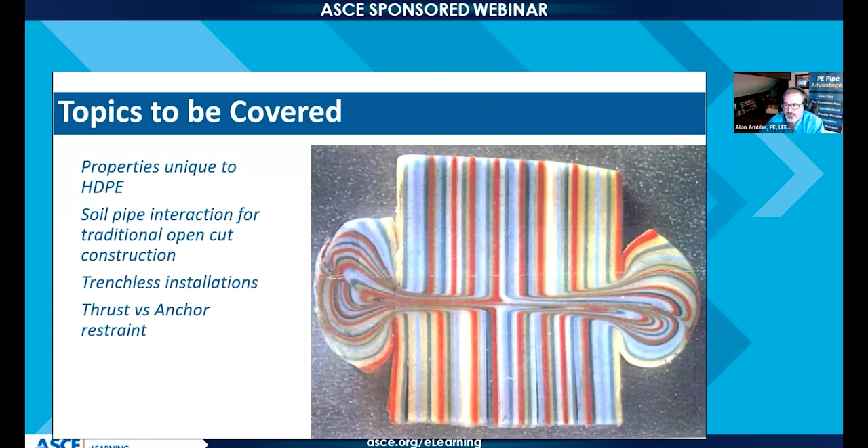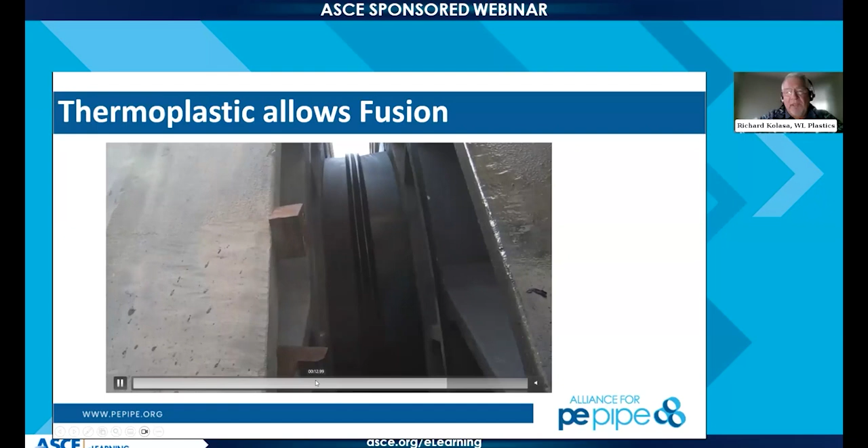So here, Richard, thermoplastic allows fusion. Go ahead and tell us what we're looking at here. Yeah, thank you very much, Alan. It is important to understand these unique properties of polyethylene. This fusion process makes our connections, we'll say, not really joints because it's not really a joint, it makes it monolithic. As you saw in that previous slide, that's the fusion joint coming together in a molten state. So you get very good bonding between those two surfaces, not only mechanically, but physically and chemically.

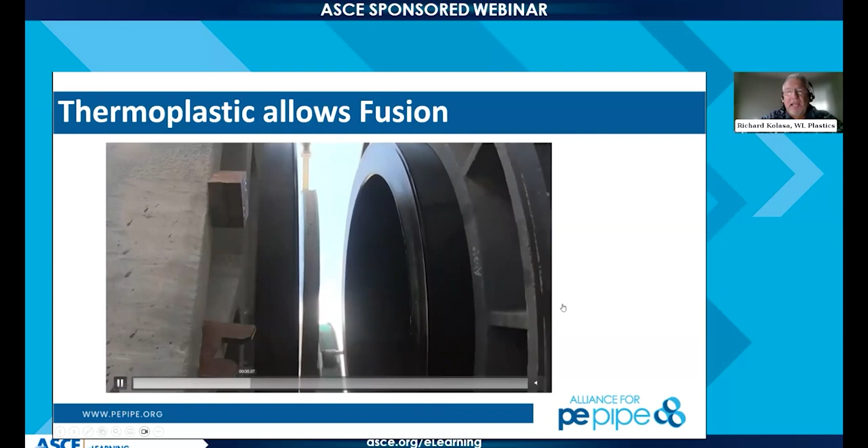So it's kind of misunderstood. They say, well, that beautiful smooth surface is really nice to see. You don't want to see a concave surface in there when you're fusing, because that means you had pressure in that molten surface area and you've pushed that molten material away from the fusible area. So that's a really good example and picture of how that fusion takes place.

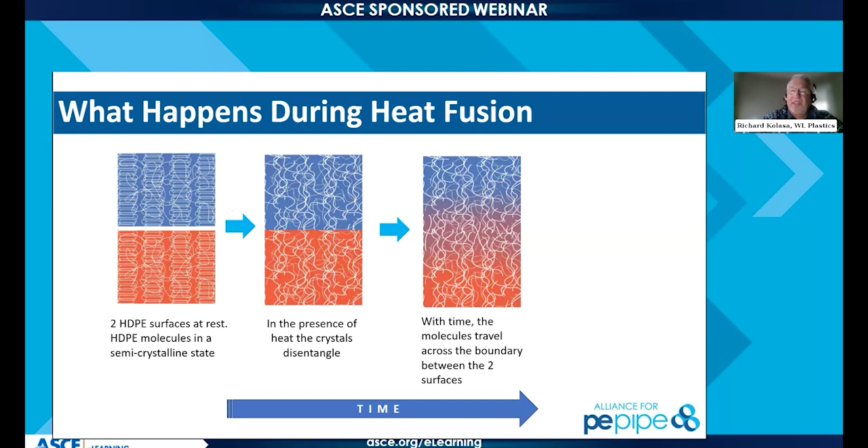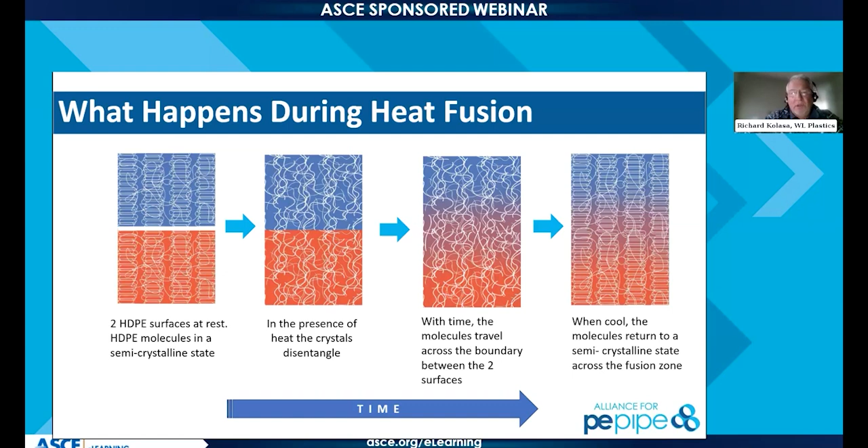And those little strands between those little round circles are describing that area, and those crystalline, straight line areas in this first area, and amorphous regions are the areas between those crystalline areas, which is about 70 to 80% crystalline structure, will affect tensile strength, stiffness, chemical resistance, and permeability. And those are the key aspects of what your piping lines will actually do, and how that piping line will perform.

So, Richard, this is a heavily engineered, from a chemical engineering standpoint, product. Is that correct? Yeah, that's correct. I mean, you can think of plastics, anything from a low molecular weight plastic such as candle wax, all the way up to our high density polyethylene pipe, which is very, very engineered. And it takes a lot of catalyst, a lot of reaction technology to put these polymers together to make sure that those crystalline areas are all uniform in size, so then you minimize the amorphous spaces between them. But then we also have technology to add comonomer into those amorphous areas to actually increase the amount of entanglement that we have between those molecules to give better strength, stiffness, and toughness.

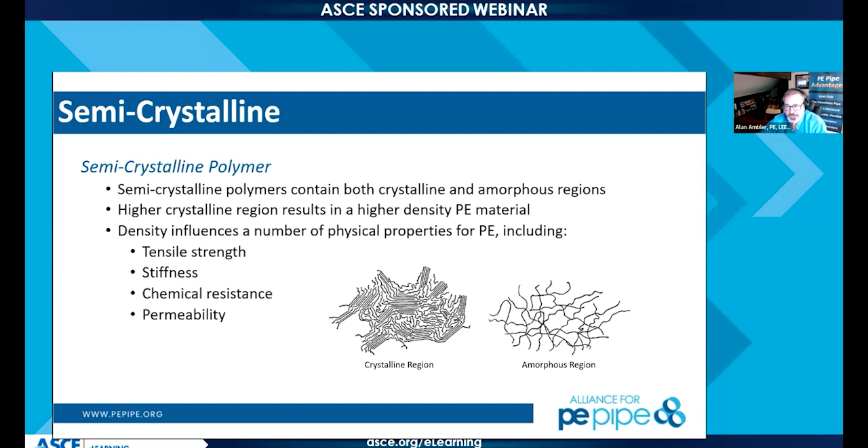So you can certainly introduce this concept of viscoelastic behavior to us, Richard, and we're going to permeate the remainder of the presentation with this term in particular. It can be somewhat difficult to grasp, but tell us about it, Rich. Yeah, and you're not wrong about that.

Viscoelastic behavior is behavior, especially on the yield point of the polymer. So before you have permanent deformation or breaking of those polymer chains, you can have this creep or deformation effect underneath that yield point, where if load is applied or stress is applied, you can have strain deformation in this product that needs to be understood.

And if you're underneath that yield point, then you need to really understand that you're rearranging the polymer a little bit, but it's just like taking a spring and stretching it out. You kind of change the appearance of that spring because you're opening up that gap or that amorphous area.

But then when you release that stress, then you'll have relaxation. So then you'll have a behavior that it will actually come back to its original state. Now, we've had lots of discussion about how much does it do it, how little does it do it.

A lot of the testing that we've done with this unique property of high density with stress relaxation, if it is under very little stress, let's say 10 to 30%, because you think about a horizontally directional drilled pipe or a bursting pipe where you have tensile stress being applied to these pipes, then we want to make sure that that pipe relaxes and recovers to make sure it establishes its performance for pressure rating or even a gravity fed situation where you don't want it to deform under soil loadings either.

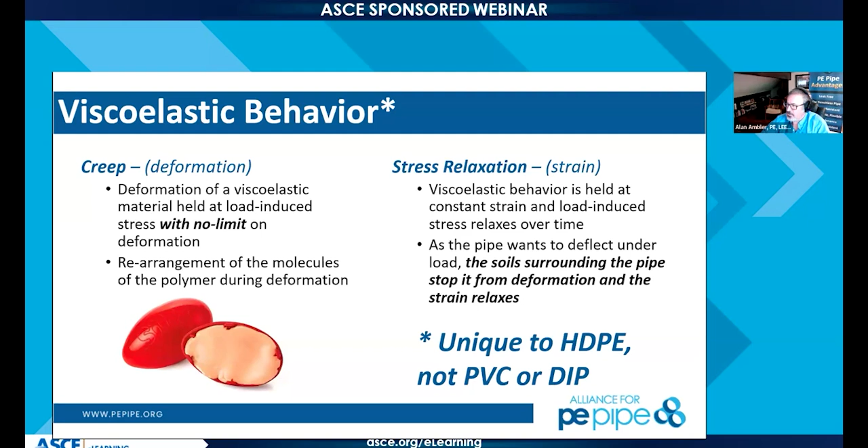Okay, we'll certainly talk about that more. Can you give us a little bit of information about Poisson's effect before we turn it over? Yeah, absolutely. Poisson's effect is when we start up a polyethylene line, which we kind of learned a little bit the hard way.

When we started connecting to more legacy products or Bell and Spigot products, let's say we drilled under a highway and then we connected to a legacy system, we wanted to connect that pipe very, very quickly. And so not only did we leave the pipe above ground where it expanded a little bit, but then we put it in the soil and it wants to contract.

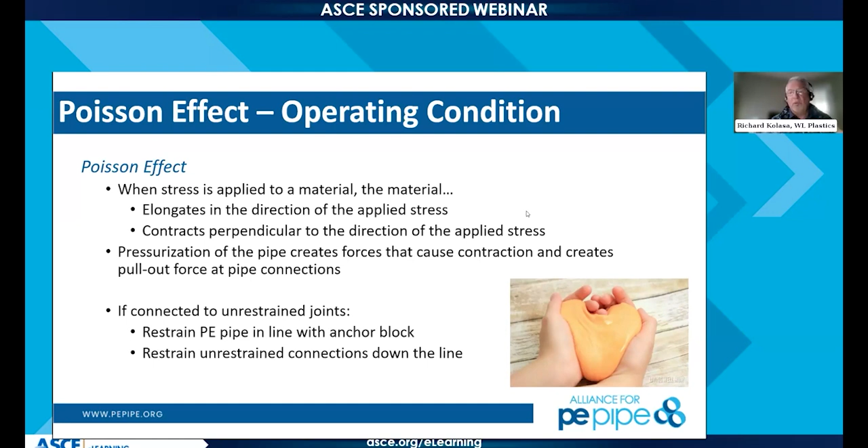So we have an additional temperature stress that's added, but we also have, when we put it all together and we fire up the line and we pressurize it, a pressure vessel effect, which is Poisson's laws, where you'll have expansion of that pipe in all directions, which actually shortens that pipe.

So this is a pictorial visual effect of that contraction. We don't want to pull that Bell and Spigot that we're connected to, or the one or two sections that we're connected to, in.

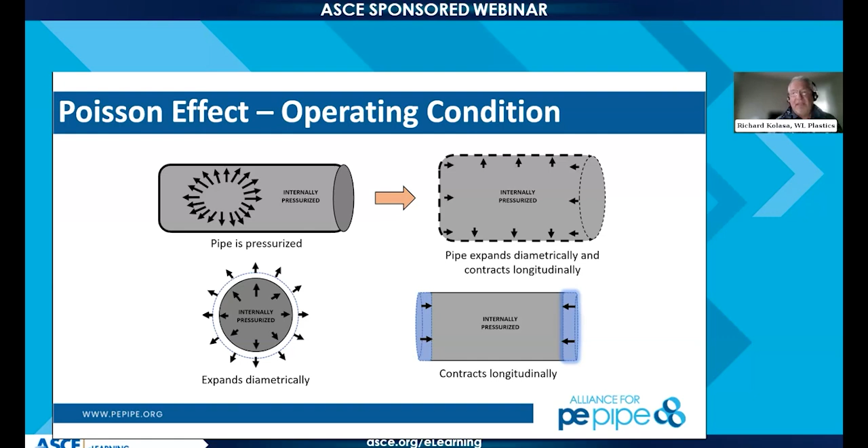So we probably have to restrain or put some kind of anchor system in there to stop that event from happening. So we can calculate those stresses and we can make sure how far or how big those blocks have to be, which we'll get into detail later.

So, Peter, you brought this to our attention here. This is Performance Pipes 813TN, a technical note issued to try to calculate some of those pullout forces. Do you want to elaborate a little bit about this for us and how this might have helped you in looking at Poisson's effect and trying to calculate something in the field?

Yeah, sure. Whenever we're looking at pipelines and longitudinal demands, we need to consider the effect of hydrostatic thrust forces, the Poisson's effect from internal pressure, thermal loads, and any seismic demands.

And specifically when it comes to HDPE, Poisson's effect is one of those items that's a little bit more significant to consider, because as the pipe wants to expand, you develop a hoop stress in the circumferential direction due to internal pressure. And as a result of Poisson's effect, you develop a strain in the longitudinal direction of the pipe. So if the pipe is not restrained at the end, it'll want to move.

As Richard mentioned, if you're connecting to a legacy pipe or any kind of structure that's sensitive to displacements, that movement may be problematic. In that case, you'd want to restrain the end of the pipe, and there are methods available for calculating the expected pullout force.

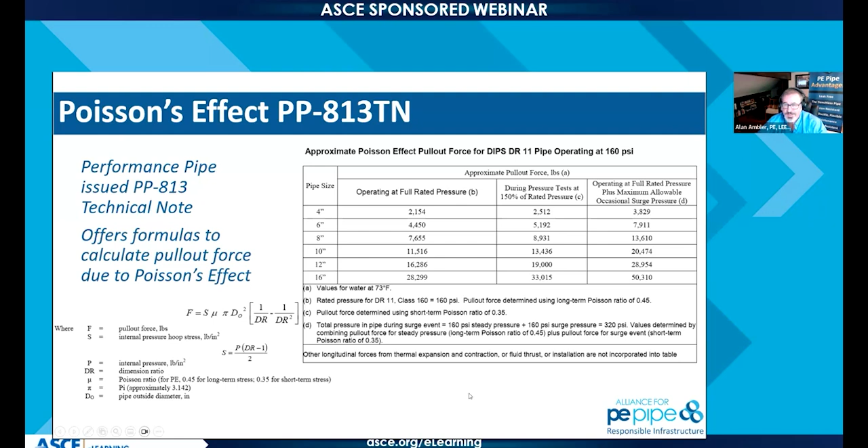That difference is specific to this calculation as it's shown. There are many other developments within the resin progress from 3608 to 4710 that we show in much more recent material as well. But again, there's tons of material available from the Alliance for PE Pipe, definitely take a look out there as well.

So here we're attempting to quantify thermal effects for you. These calculations came specifically from PPI's handbook on polyethylene pipe. It gives us a great scientific foundation as to how to calculate what we'd see as a temperature change in the field. One thing the reference indicates is that field observations can sometimes be slightly different than what we see in the theoretical calcs.

Sometimes the theoretical calcs assume instantaneous change. In other instances, if it's solar, the bottom of the pipe resting on the ground may very well be different from the top of the pipe. And sometimes the fluid in between can actually change a bit too.

So Brian, do you want to talk us through this fourth bullet in particular, which is the assigned number as theoretically proven? Can that be considered a working number, or how much more time should be spent in the field trying to see exactly and observe what's happening with the HDPE?

I believe you're still on mute, Brian. Yes, sir, I am. Thank you.

Yes, thermal is very important for two reasons. In trenchless, you can put a pipe in the ground and it's been sitting in the sun, and then you pull it through the ground, which is much colder, and you get to the end of your drill and you want to cut the pipe off and do something. Well, that pipe is still cooling off in the ground there. If you cut it off the rig too soon, your pipe's going to get sucked back down the hole because it's cooling off and shrinking.

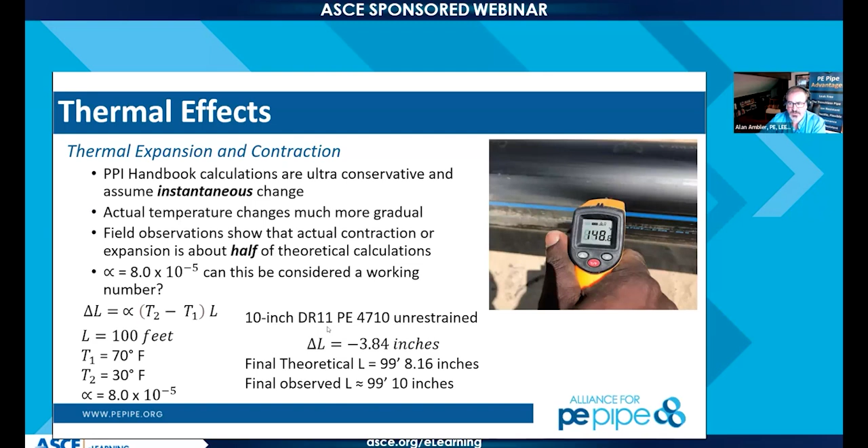Yep, that's always good practice in pipe bursting, especially. We over pull. That way you're not ending up too short in what you have. Then once that pipe naturally relaxes, you can come back and make those final connections as we come through.

Here's some of that theoretical as we follow through more with specific temperature change. One thing I've observed is accurate estimation of what could actually happen in the field, as far as temperature change a pipe might endure, is pretty important for what we're looking at. One of the unique things about high density polyethylene is it has a lower modulus of elasticity than other pipe material types, and a higher coefficient of thermal expansion, which allows it to change more. In this example, we did 2-inch DR11 HDPE and 2-inch schedule 40 steel, 40-degree temperature change, 200 feet length. The HDPE would move 8 inches.

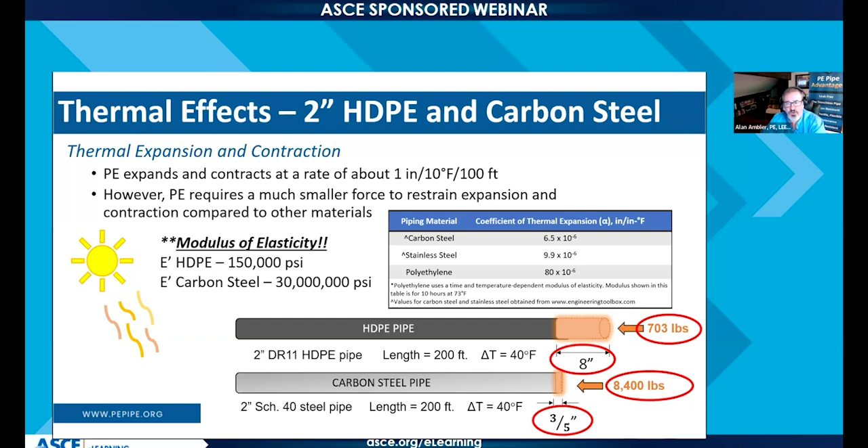However, it would take significantly less force, 703 pounds versus 8,400 pounds, to restrain that pipe from moving. This calculation gets us a force over the actual wall thickness of the pipe. The expansion itself isn't a function of wall thickness or diameter, as we'll see from the next example: a 10-inch DR11 at the same length will still expand the same amount, but generate significantly larger forces because we're transmitting that stress across the cross-sectional area of the pipe.

So those are certainly unique properties to HDPE, and we'll talk a little bit more about some of this later, unless somebody wants to add something in particular.

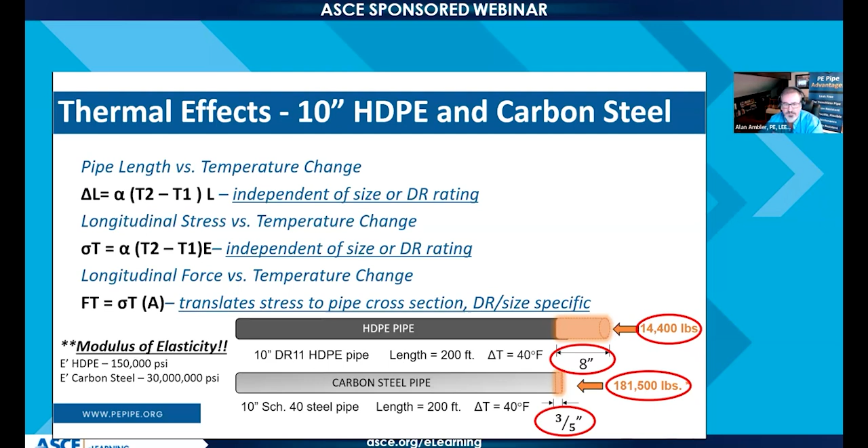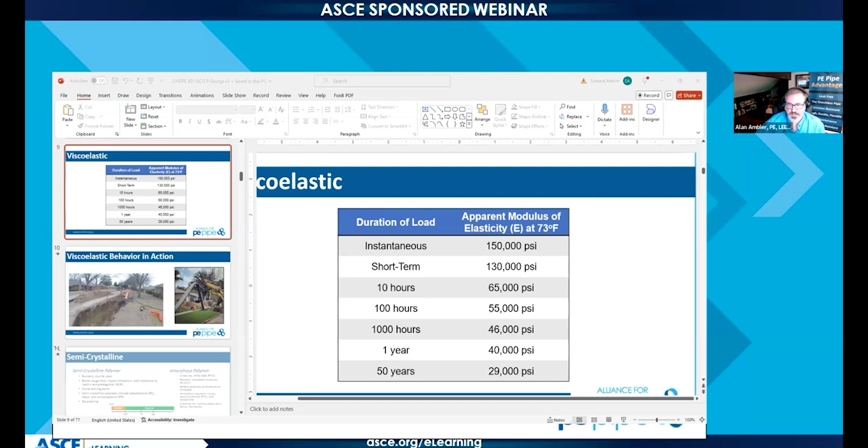Okay, great. Just on your screen here, I did bring up some tables about the changes of the apparent modulus of elasticity over time. As Brian mentioned, that is well documented, and available for you in PPI's handbook.

We did have a fairly basic question, and sometimes we take some of those for granted. I knew nothing about running a utility before I started at the City of Casselberry as a utility manager. I looked at everybody and said, 'Hey, take me out in the field and treat me like I'm a kindergartner, because I don't know anything.' So we certainly learn more going back to the basics.

So Peter, if you can come on and talk to us now - there's a difference between thrust blocks and anchor blocks, and we'll get into that a lot later. But sometimes you would thrust block a PVC pipe for changes in direction, but you don't necessarily have to do that for HDPE. Do you want to elaborate a little bit for us on that?

Fundamentally, the way you can provide thrust restraint is either through providing restrained length on your pipe, or the force is transmitted from the pipe to the soil through bearing and friction, or through the use of a thrust block. The thrust block is just cast at the elbow and transfers the thrust force directly from the elbow to the soil through bearing.

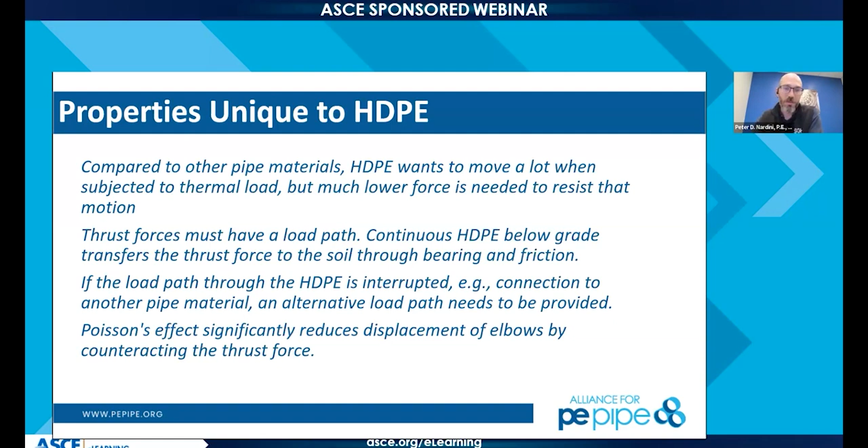The purpose of providing that load path is for pipes that have bell and spigot type joints. You're not transferring the axial force through the pipe, because that axial force would disengage those bell and spigot joints. So for that type of pipe, the thrust restraint mechanism for pressurized pipe is going to be a thrust block cast at the elbow.

Okay, great. We're going to keep going here. Show you some things about open cut installation.

Ductile iron, PVC, and high density polyethylene are all considered to be flexible pipes when we look at the trench itself and how we're installing it. Any load put on top of the pipe is transmitted equally to the soil surrounding it through stabilized passive resistance. So it forms a pipe stiffness and a soil stiffness that work together to share the load.

Those are different from rigid pipes, where the hoop stress or strength is considered significantly higher than the weaker soil, in which case that pipe is tasked with directing all of the load on top of it to the soil underneath it.

It's interesting to note that even though the hoop strength or elastic modulus of HDPE is significantly less than ductile iron pipe, the interface it makes with the stabilized soil surrounding it makes a big difference.

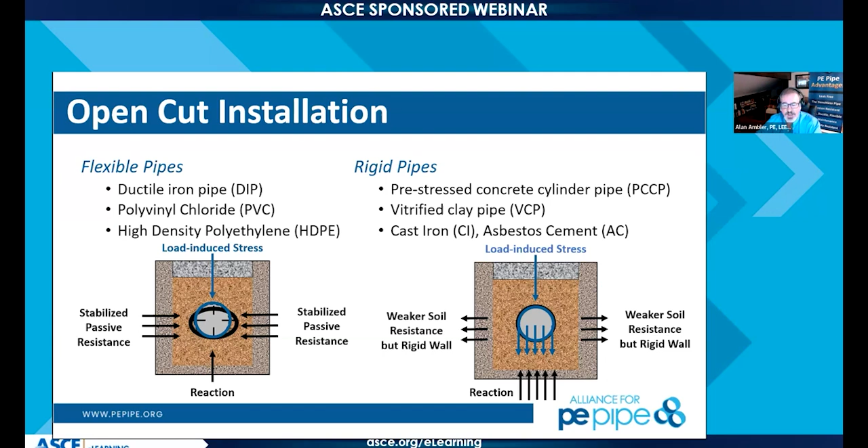This is very different from a thick wall HDPE pipe, such as a DR7 or DR11, all the way to a DR32.5, which is much thinner wall. We've had some discussion about that thin wall non-pressurized pipe, and we'll do our best to continue with that.

Brian, I'm going to go through and eke through this one while I want you to talk about it and elaborate. Everybody on the call, we do have 30 minutes left. We do have some slides to get to, but this conversation warranted extra discussion, and that's the reason why we're making our way through it in this manner. Brian, go ahead and tell us about what you see here.

What we have is a viscoelastic performance of stress versus strain. Stress is force and strain is stretching one way or the other. You can see the elastic material - if you have a perfect elastic material, like steel, it'll increase very linearly in strain, or stretch very linearly as you apply more and more force until it gets to exceeding its strength. And when it does that, it starts curving over and eventually it pops.

Viscoelastic plastic materials, and it's not just HDPE - you can look at rock salt, rock salt's viscoelastic as well. It means it's going to creep. And the creep will cause that elastic curve, instead of being straight, to start bending over with time.

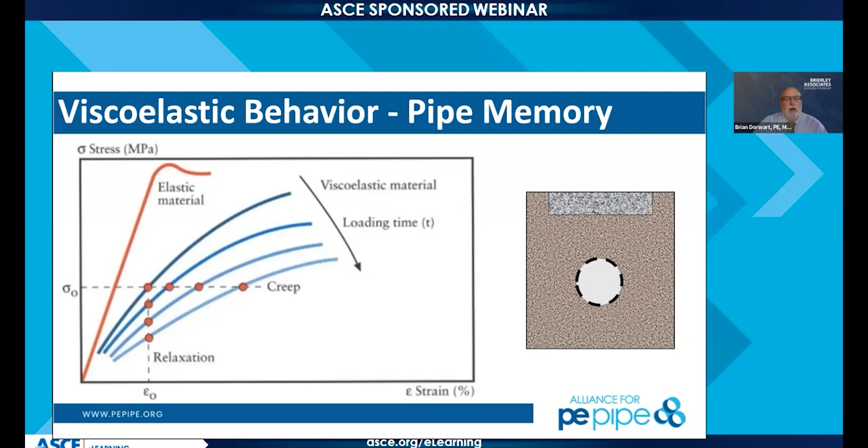That's what these different curves show - as you increase the amount of time, those curves show that the creep has more and more effect. In other words, it strains, it stretches more. Doesn't necessarily mean the strength has changed, and it doesn't necessarily mean the modulus under the elastic portion has changed. However, the modulus for your design has to take into account the creep factor, and that's what this chart shows. You treat it differently than you would an elastic material. The whole idea is understand the material, design the material for the properties of the material, and you'll be fine.

So when we translate this concept to open cut construction, and we have a balanced, supported, installed pipe with proper backfill, proper compaction, and safe loading conditions, then that creep is halted and stopped over time through its interaction with the soil itself.

If we have a pressurized pipeline, in many instances, the loading that occurs on top of the pipeline from external forces will be substantially less than what the internal pressure trying to get out of that pipe actually is. I'll show you some calculations we go through for the M55 manual to demonstrate those actual calculations.

Alan, I would love for our panel to tackle this question from one of our guests. It reads: are there any recommendations when considering Poisson's effect on a water main with hydrant tees? The hydrants need to be located in very specific locations. Do we consider the Poisson's effect when determining where to locate the hydrant tees? And my add-on to that question would be, does that creep, that movement of the pipe, affect that location, or does the soil load hold it in place?

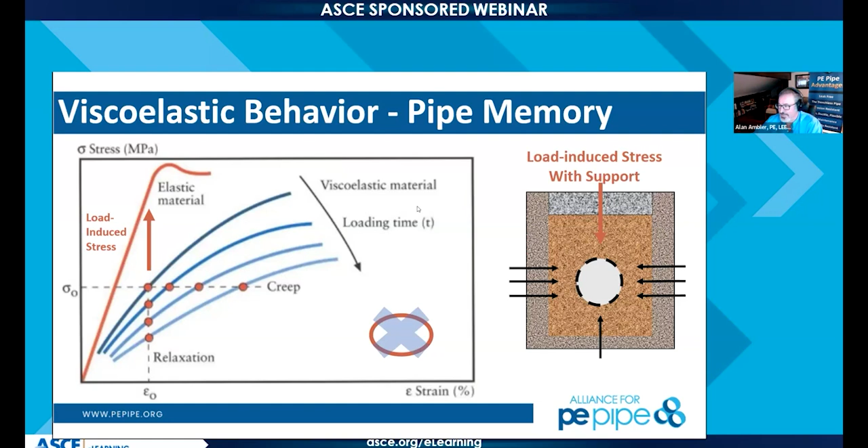I'll breeze through these ones fairly quickly. The terminology of pipe embedment materials comes straight from Amster Howard, one of our godfathers of trench design and understanding, with lots of good field work. What we're trying to do is prevent flotation and other issues, looking at a solid foundation, bedding, embedment, and then backfill, which supports all the parts and pieces of the trench for us.

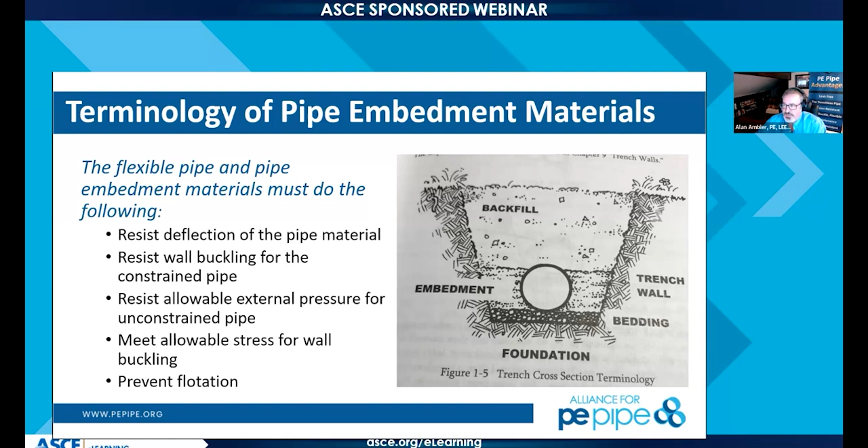I'll play this video that some people might think shows a generally archaic way of installing pipe, but I'll tell you right now, it's got a solid foundation. That's just undisturbed soil at the bottom, free and clear of rocks. There's bedding, a soft portion at the bottom of the pipe, to make sure that as the pipe is put in the trench, it's protected from other things. We'll have a video later potentially to show the embedment process and backfill as we go through.

And here we show this video to demonstrate some of the benefits of having long longitudinal areas, and the fact that we can put all this pipe in with just two people as it's working through there. This spot is between a house and a hedge, so there won't be an H20 loading condition as we go through. It's a perfectly safe and perfectly acceptable way to be more productive in the installation of the pipe itself.

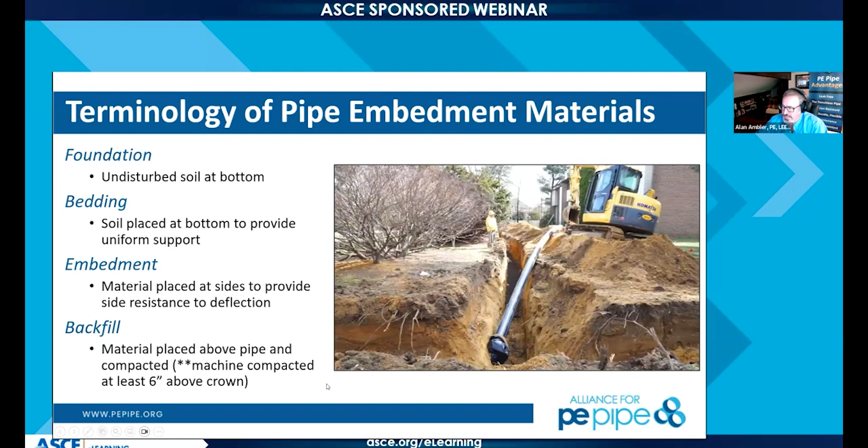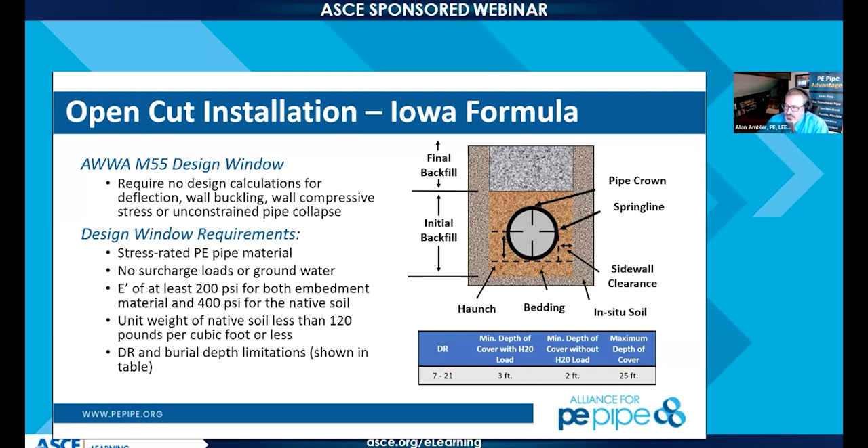I'll point everybody's attention to an M55 design window, and that's what we're looking at here. This was in the first edition of the M55 manual itself, and it shows 95% of installations fall between DR7 and DR21. If you have 3 feet of cover with an H20 loading, or 2 feet of cover without that H20 loading, and a max depth of cover at 25 feet, you're safe to install this without any additional calculations.

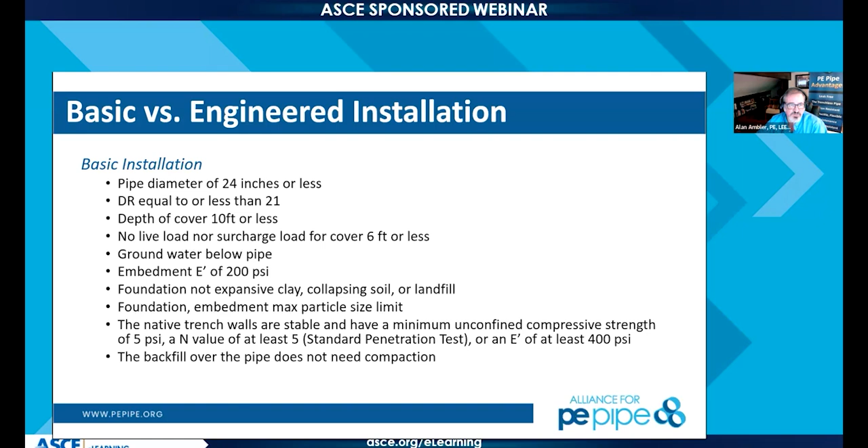That's typically what 95% of installs are about. Now we have progressed to the second edition of M55 with slightly more complexities in understanding of soil conditions. Here's a basic versus an engineered installation. This is a different format of that table, but some of the characteristics are all similar. Now when we get into that engineered installation, we'll be looking at quite as well compacted backfill and other things.

It's important for trench width requirements. For 3 to 24-inch pipe in the middle, we want that OD plus 12 inches. A lot of times simply the backhoe bucket will be able to open up the trench we want to be able to successfully put in the pipe as we're working with it.

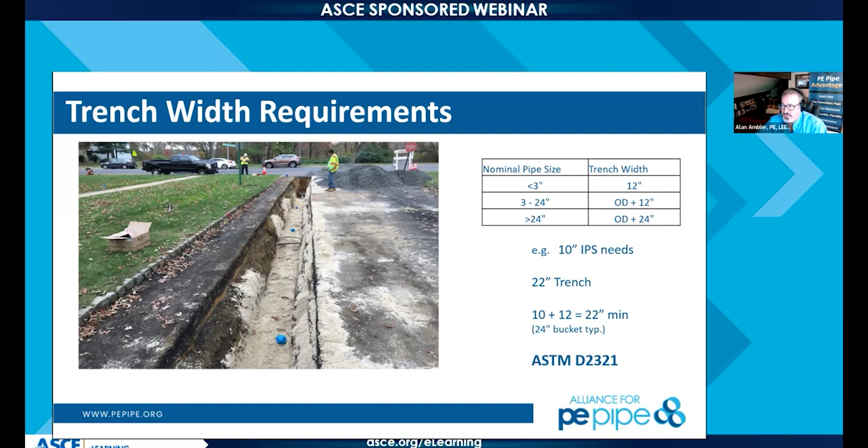Now, an embedment requirement is based on the size of the particles we're surrounding that pipe with. I'd note here the 6 to 8 inch pipe for high density polyethylene is looking for a 3/4 inch particle size. What that translates to in the field is they often put 57 stone or gravel in the bottom of the trench to stabilize the bottom, providing safe working conditions for employees in the trench. That 57 stone is what's sieved out to provide that 3/4 inch particle size, and those are the same.

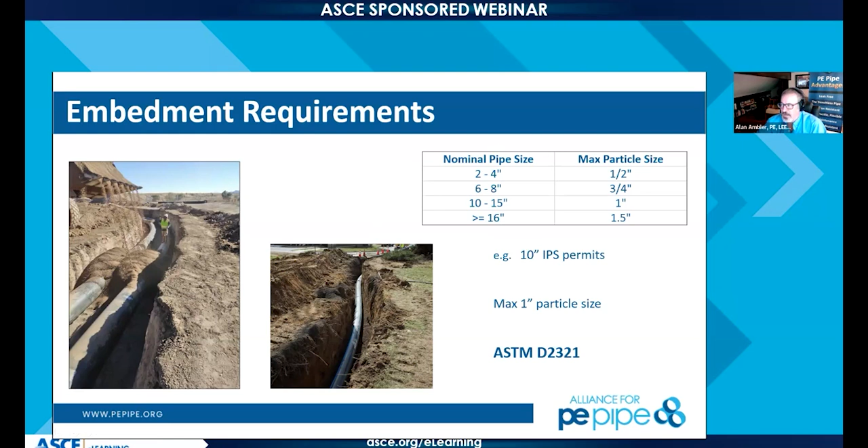So if you have a bunch of that on site, it's perfectly safe to put it through a 6 to 8 inch pipe, surrounding that embedment all the way up if that's what you prefer. When we get into a larger pipe, we're looking at a slightly larger max particle size, where the industry is trying to limit rock impingement on the exterior of the pipe itself, so it's free and clear of other defects for a better backfill embedment type condition.

The two things we're looking at for open cut installation are a pipe stiffness factor and soil reaction. As design engineers, we can make some estimations for what that soil reaction might be. That soil is not only the embedment, but also how that embedment reacts with the trench wall. It can be calibrated through field work, and we're going to get to a spot where Brian will elaborate on that a fair amount for us.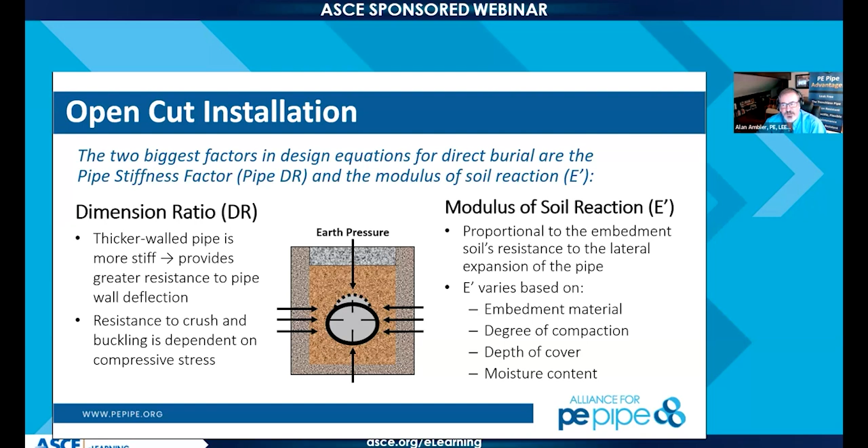These are some of the things we actively try to calculate if we're outside of that design window, or if we have fairly challenging installations. They're all from some of the Iowa formulas for this deflection we're looking at. One very interesting thing to note, and I won't go through wall buckling or some of the others, we'll go through some of the deflection - pressurized HDPE can withstand deflection of 25 to 30%.

When Brian and I were talking about this late last week, he said oftentimes in the gas industry, you'll fully occlude that pipe to squeeze it off, and then let it go when you're ready to let the gas flow back into it, and it doesn't damage the HDPE pipe.

We've had some questions about non-pressure applications, and the limiting factor won't necessarily be the deflection to yield of the pipe, but the operation of the system. So gravity sewer systems in particular, we want to make sure there's no sumps, no slumps, or other things that would accumulate particulate material or block up your ability to convey, requiring lots of cleaning. The operation of the system for a non-pressurized system controls much more than gravity sewer or the deflection of the HDPE in that scenario.

Brian, was there something that you wanted to elaborate potentially on in some of this?

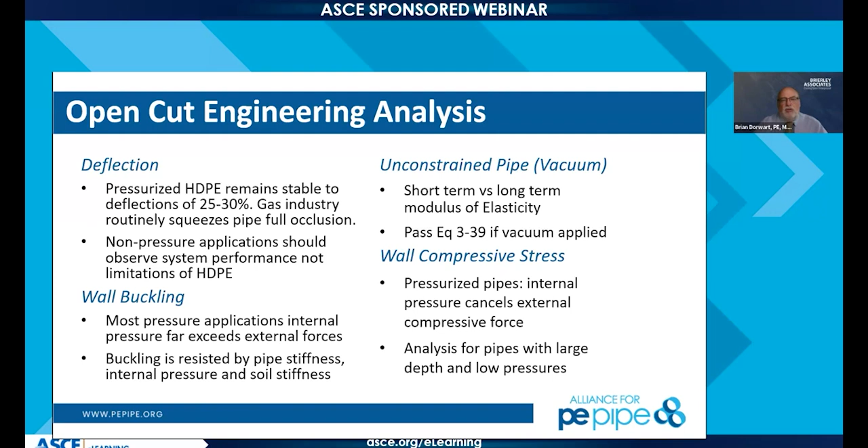But soil is very important, and that's where the modulus E prime comes in. AWWA has spent quite a bit of time determining, with studies of several hundred projects, what is E prime? E prime is a magic number to make the field and the calculations work together so that you can predict, which is the object of engineering.

But you got to understand what E prime is. It's a correction factor. AWWA has come up with a way, based on field testing, of here's different types of materials with different types of E primes given the density of the material and the grain type of material. So there's some good information in M55 on both compaction as well as native soils around pipe for trench filling.

Recognize, however, also in the long term, this same equation gets used for pipeline rehabilitation quite a few times. It's one of the main formulas or base formulas for 1216, for rehabilitation or putting in CIPP liners. The issue there being you have now a trench that is stabilized, and you're trying to put in a CIPP liner.

If the pipe is in the trench and it's happy, in other words, it hasn't failed or anything like that, you really don't have any load. All the load on your CIPP is going to be carried by the host pipe. So the E prime is dependent on what the host pipe is seeing, not necessarily on your rehab pipe.

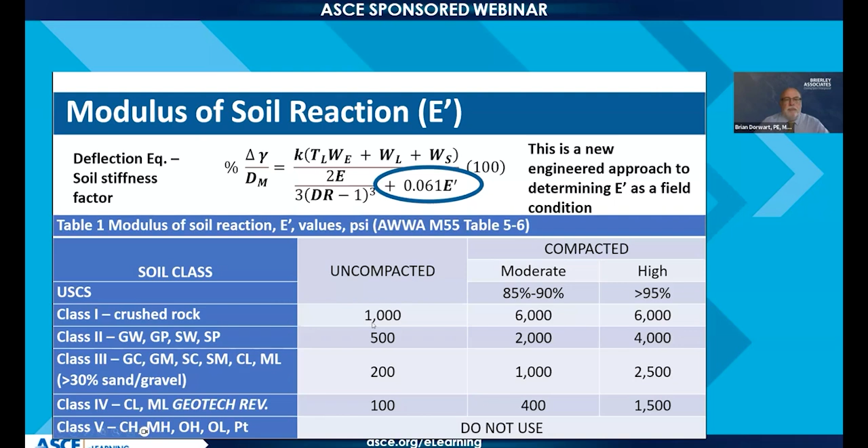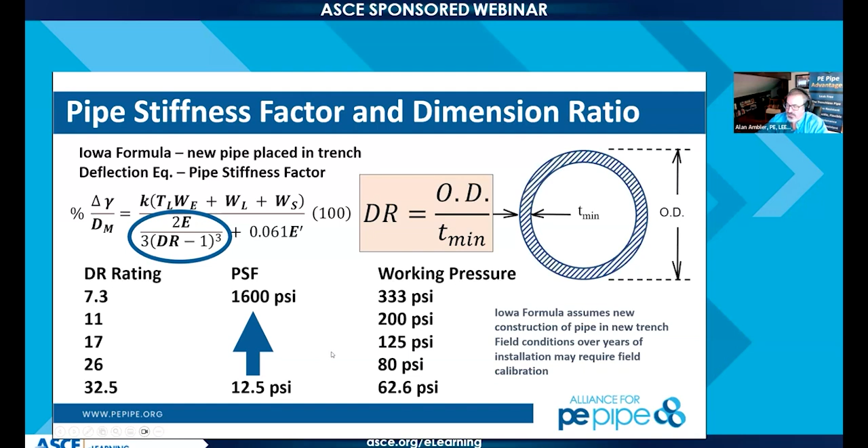Okay, so one of the slides I kind of glossed over here shows us that pipe stiffness factor. This does work with the exact soil stiffness that Brian was just discussing, and we'll see a fairly dramatic difference between a DR 7.3 and a DR 32.5. So when we start to look at that thinner wall pipe that's outside of the design window we were in reference to earlier, then yes, that engineered backfill gets significantly more important to us as we continue through it.

So one of the things I'd like to note to back up what I mentioned previously is a live load on a pipe from an H20 box truck loading. If we are at 8 feet depth, the external load on top of that pipe is going to be less than 1 PSI. So all of the pressurized pipelines, when we're operating at 55, 70, or a design life for a DR11 pipe of 200 PSI, are now exponentially larger than that H20 box truck loading at that 8 feet depth.

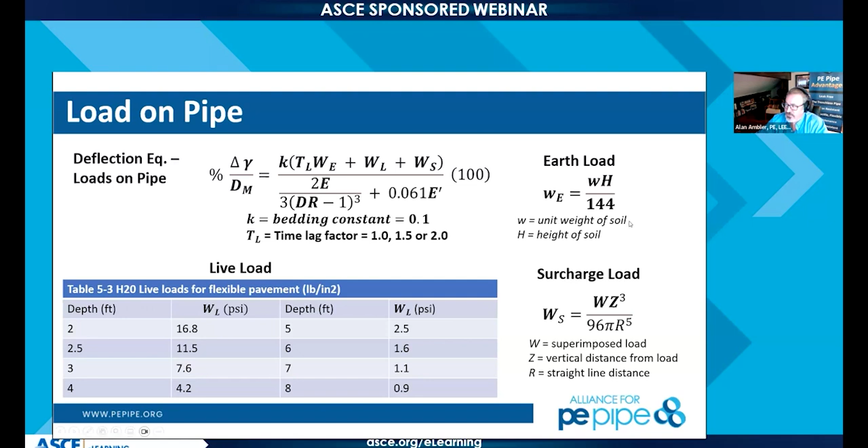So there's quite a bit of difference between the two. If you have specialized loading conditions for earth load, surcharge, or other, then we want to make sure we go through that. I'm not going to get through these calculations. We'll talk a little bit about HDD, Mike and Brian, if you want to tag team, but we've got about 3 minutes before we really should launch a little bit more into thrust restraint and anchor restraint and what the difference is there.

Well, the issue on this one, I'll just take the lead on the Miami Beach because it was my project. Very interesting project, 54-inch. We had to use DR11 and DR17. We mixed it up. Because it was very limited availability of pipe, we put the higher DR at the bottom, lowest part of the bore, and then we used the DR17 on the ends of the bore, just as a way to use what you got.

The important part of this, we're putting in 3,000-foot sections here. We got to put valves in there. So we had to install the pipe, and then we had to have valves that had the strength to take the Poisson effect, this being a force main, Poisson and thermal effects. You have to look at the time that the Poisson is going to happen, which is the pump system. So that's your sequence of when Poisson is going to occur. Then you look at your temperature difference over a much longer wavelength. You'll have a temperature difference maybe over weeks or months. You take these into account when you design your restraints for that valve to keep it in place. So that was the interesting thing, trying to couple these things together.

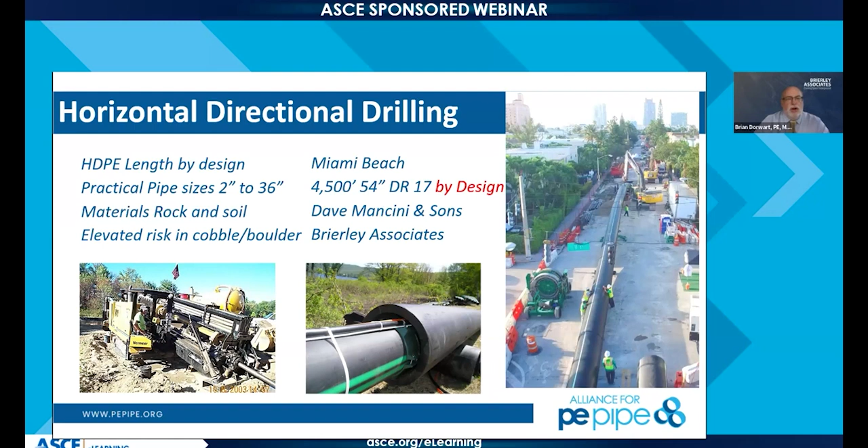I don't have a choice in directional drilling of what the backfill is going to be. It's going to be whatever's in the ground. So you've got to take into account your toughness. This is just a sequence of directional drilling. It's totally blind - you don't know what's in the ground till you drill through it. You drill through it, you make the hole the best you can. When you pull your pipe through it, you're going to have to consider what that material is there, because it's going to impact the pipe, and you can have, say, a large rock on it. Maybe it'll dent the side of the HDPE a little bit, but you'll still be able to pull through it. It'll still be functional.

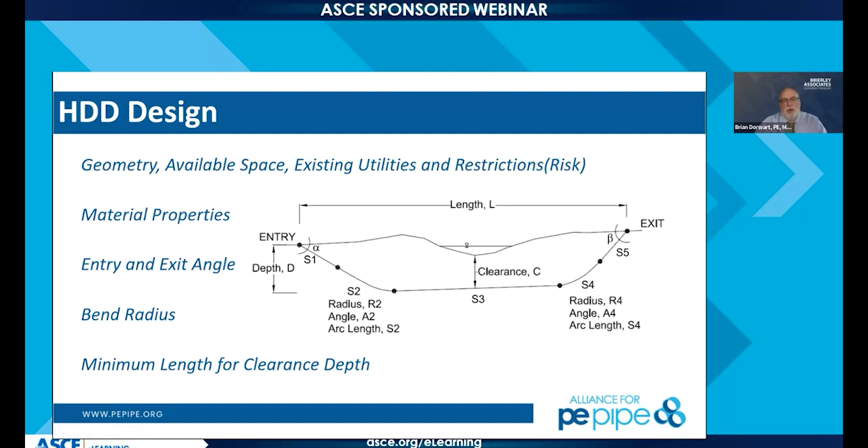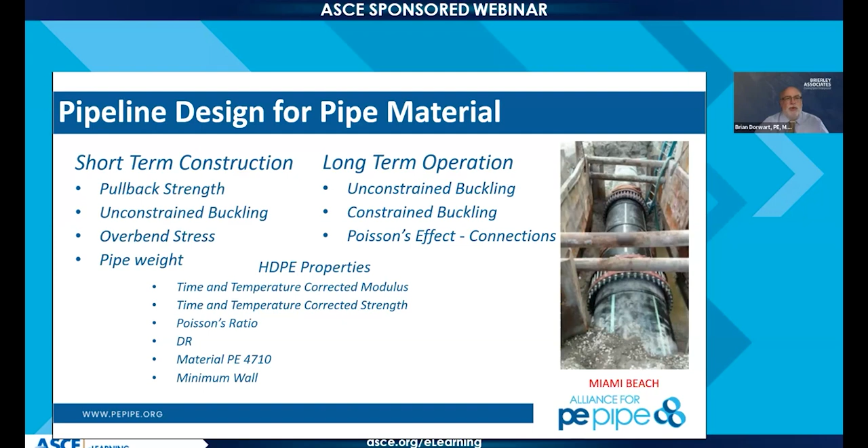These are just a couple of examples of trenchless installations. The only other one would be more of a slip lining or bursting with HDPE. Again, you've got your material around you when you're bursting - it's going to be left in the ground. We found that you can use PVC, but with HDPE, it takes a tremendous amount of abuse if you have a problem product, that host pipe that you're trying to burst. The HDPE comes through, even if it gets some scratches on it, it's just not a big deal, mainly because it's a gravity pipe, so scratches you don't really worry about, only in pressure pipes. Then there's certain rules for depth. So with that, some of the surface problems and shallow installations, I'll let Peter discuss that a little bit.

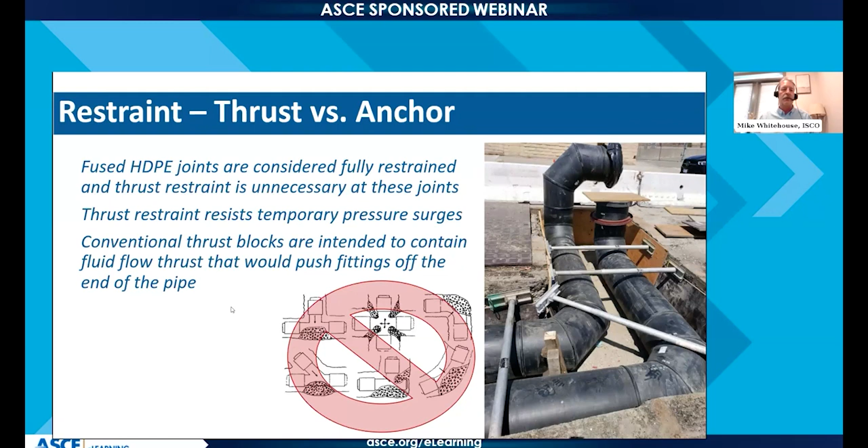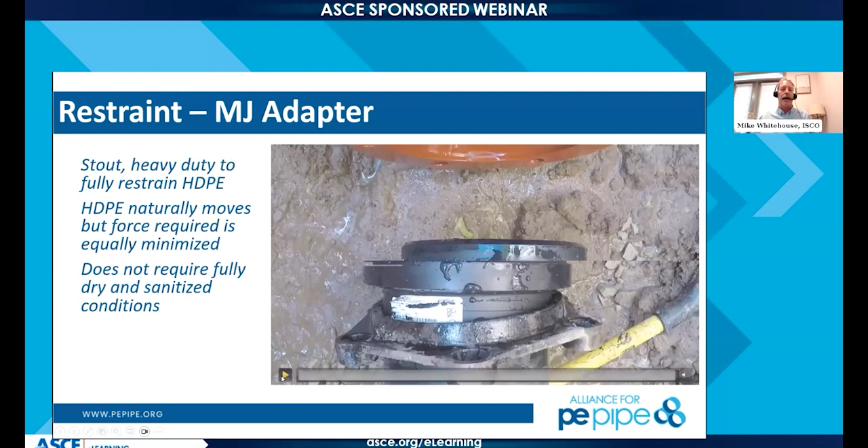The things that make polyethylene so advantageous to trenchless technologies are the same things that make us so successful in seismic applications - we have a very high allowable bending strain, incredibly high toughness, the ability to absorb impact and energy, and more than sufficient tensile strength to keep the piping system together. And the fused joint, once executed correctly, has the same hoop stress and tensile strength as the parent pipe itself - that's something very unique to polyethylene.

Here's an example of a heavy-duty restrained joint as it's connecting to a valve. This is called an MJ adapter, and it's very common in our industry - it's injection molded and fused right on the pipe.

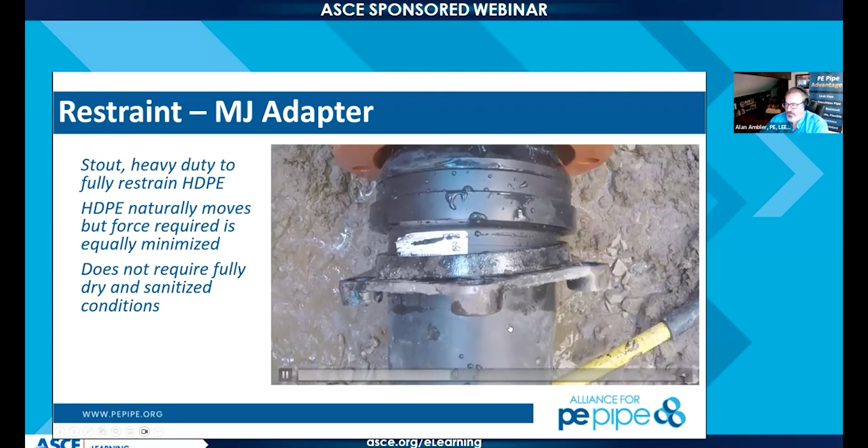That's another way to do it. I'm going through these pretty quick, guys. This can be done under wet conditions, as you're seeing, since water presence for fusion is a no bueno, as Johnny Canturi would say. Here's an example potentially of an anchor restraint versus a thrust restraint.

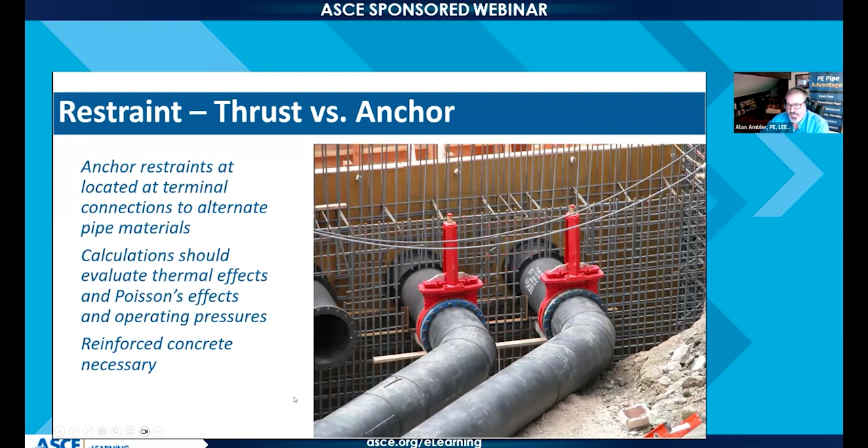Now, we don't always have the pictures we want, and this picture happens to be controlling a water treatment plant mixing plant or mixing concrete area more so than it is a thrust or anchor restraint specific to HDPE, but anchor restraints are going to be at the end or terminal connections as to what we're looking at, and we're going to be looking for reinforced concrete in there.

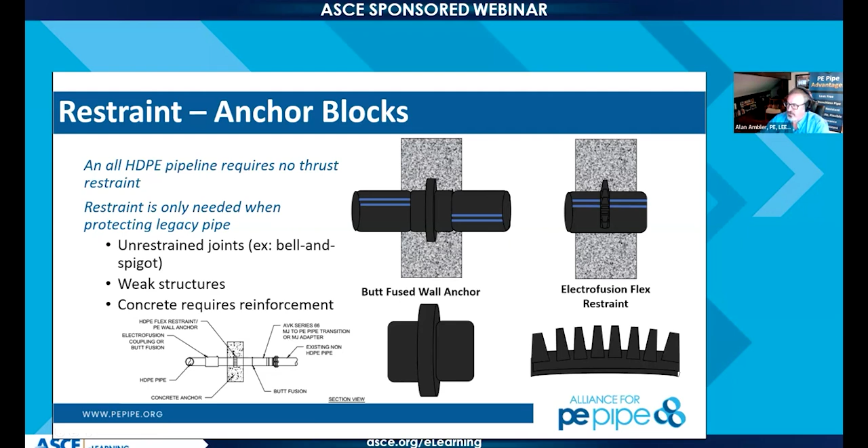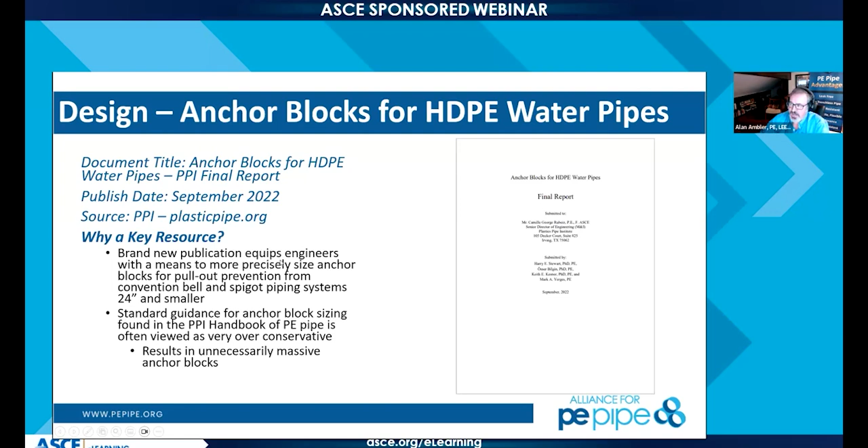So there are other adapters that you can put into buried concrete that's reinforced. Here's a butt fused wall anchor and then also electrofusion restraints. We did get a question about industry options for you, and PPI just released anchor blocks for HDPE final report in September 2022, which also came with a calculator, but sometimes these tools also need another engineering element for it.

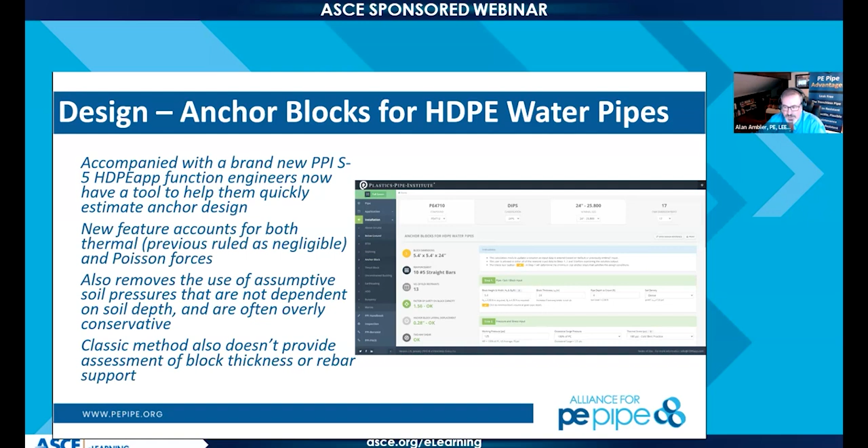So we're one minute over. Pete, Brian, Mike, Peter, come on screen as well. Any closing notes of guidance for our team here or those people out there? I'm amazed we've kept all 428 participants all the way to the end. So you guys have done a great job and it's inspirational itself for those curious about thrust restraint, and you have about 30 seconds apiece to give us some closing arguments.

Okay, Pete can talk a lot more than 30 seconds if we don't have it.

Mike? Sure, I would just say, again, thanks for the opportunity to be here. And if people have questions about thrust restraint, do not hesitate to reach out to myself or anyone here on the call or with the Alliance. We're happy to help you, and we want to help you. We want your projects to be successful, because if you aren't successful, we aren't going to be successful. And success is what we want to achieve.

And as far as the takeaway I'd like to offer, PE pipe and any pipe that you put in is very sensitive to soil. It's a soil structure interaction. You got to understand what that is. As an example, in the HDD process, if you are using drill fluid and the drill fluid is below the water table, the drill fluid will become thixotropic, but it's really not going to have any more than a very, very soft clay friction factor to restrain your pipe. So it's not going to restrain it very well.

The minute you come above the water table, the friction goes up quite a bit because your moisture content goes down to what the surrounding moisture in the ground is. Your friction goes up, so look at your friction. It is a very real thing. It can help you out, but also watch where your water table is and what your friction is being applied from, what kind of material. Peter?